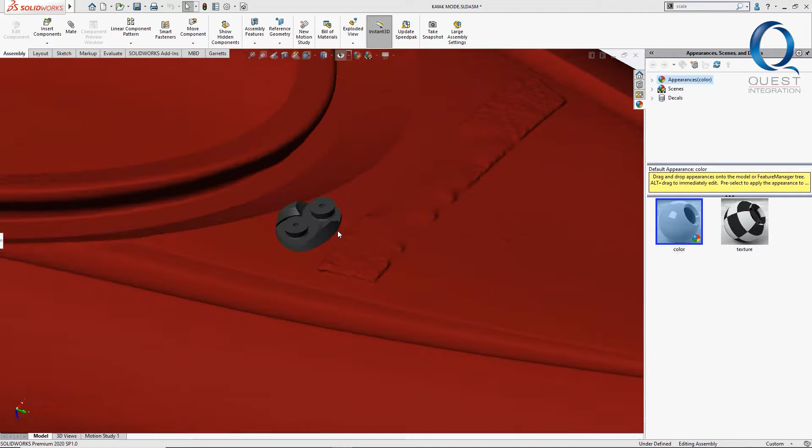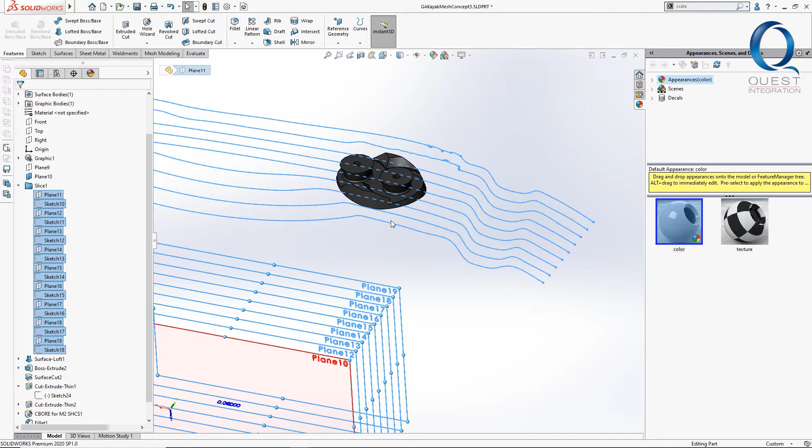All right, so if I come into SolidWorks here and open up the model, we can see how it's fitting there on the kayak, but I can select my slice features here, and we can take a look at the information that I got from the scan. I brought that same STL file in here, did a slice of that top of the kayak, and I was able to create a surface using a surface loft and those sketches.

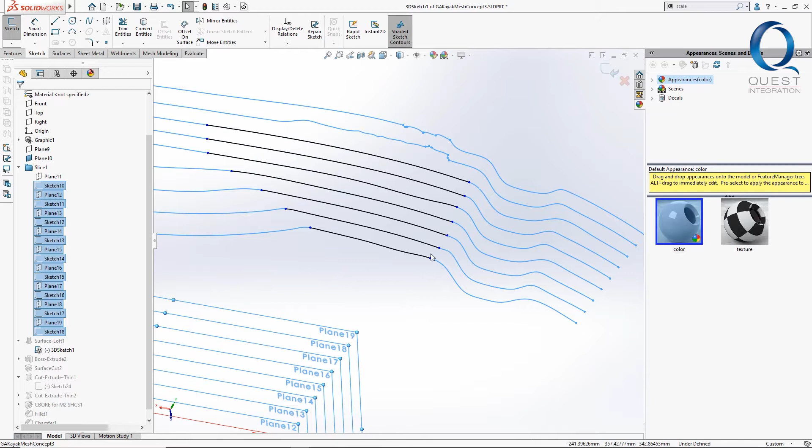You might see that I created a 3D sketch, and I actually just converted over portions of these sketches because I didn't want that whole surface. So I simply selected those, did a convert entities, and then I was able to just drag the endpoints to where I wanted them to be. And that gave me just that surface body that I wanted.

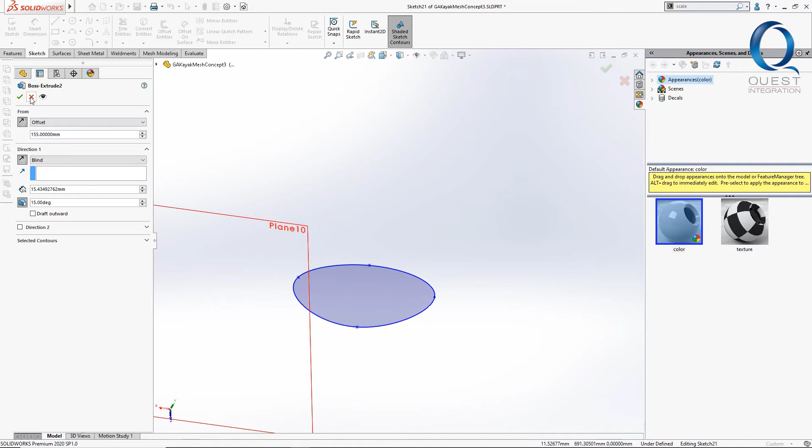We'll go ahead and roll back, and next thing I did was just a simple extrude. I just created an ellipse there, and I did that with draft. And then I did a surface cut. So I used that surface body that was generated and created a surface cut. You could also do this with the replace face command instead of surface cut, but surface cut works just as well here.

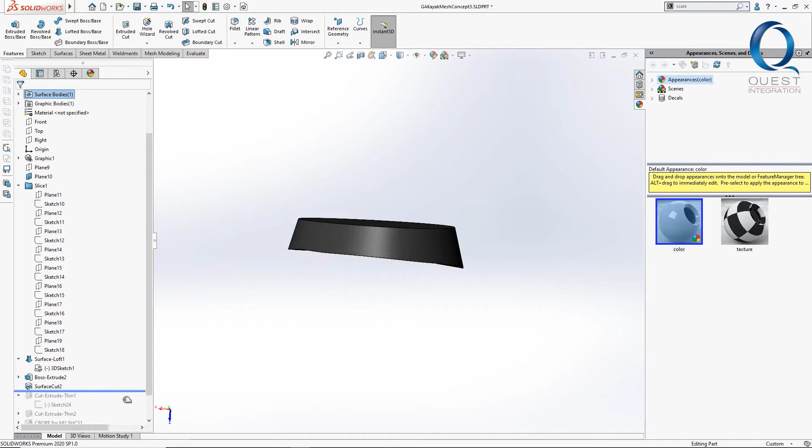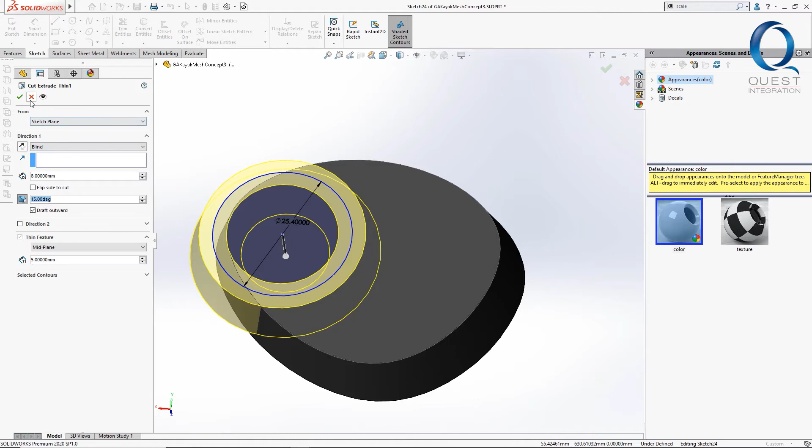Next thing I did here for these shapes was simply an extrude cut, just a thin extrude. That allows me to use this circle instead of creating a closed contour, just specifying how wide I want this to be. And then I could taper it down because I wanted those angled surfaces to allow the paracord to bite against itself and against the model to get enough friction to make it bind up there for me.

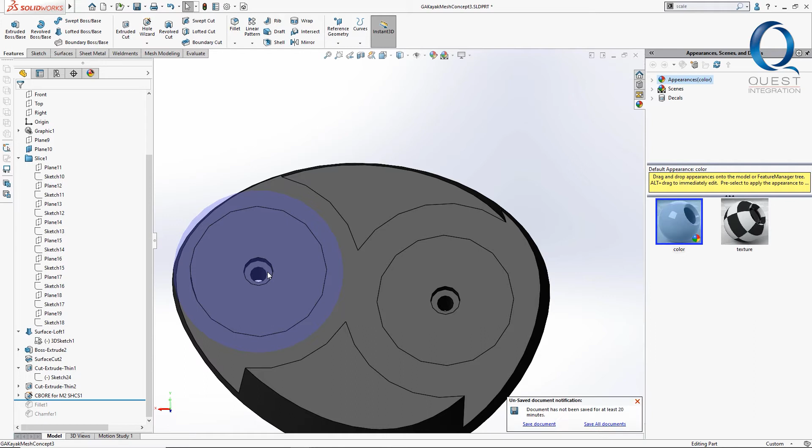And then I did that same thing again here, a little bit larger diameter circle, again with that same draft to get the geometry that I wanted. Then I added some counterbore features. I wanted to be able to line this up so that I could screw it down, but I wanted to put the screws in underneath. So I needed to be able to drill through this and then screw it in through the back. So I put those counterbore features there so that I could create some plugs to cover these holes after I was done using them as locators.

Then I just added a couple of chamfers here to remove some of the material to make it easier to get that paracord down inside of the feature. And that's how I came up with my anchor tie. Pretty simple, not a lot of crazy techniques or anything there, but it seems very effective. That paracord actually binds very well, and I haven't had any issues with it slipping at all yet. So yeah, hopefully you guys really enjoy the design.